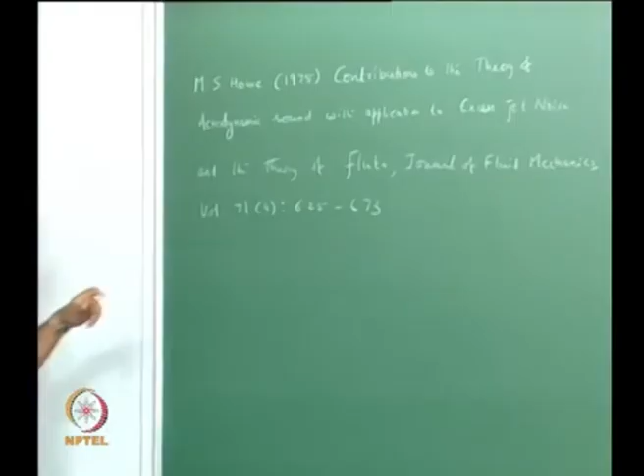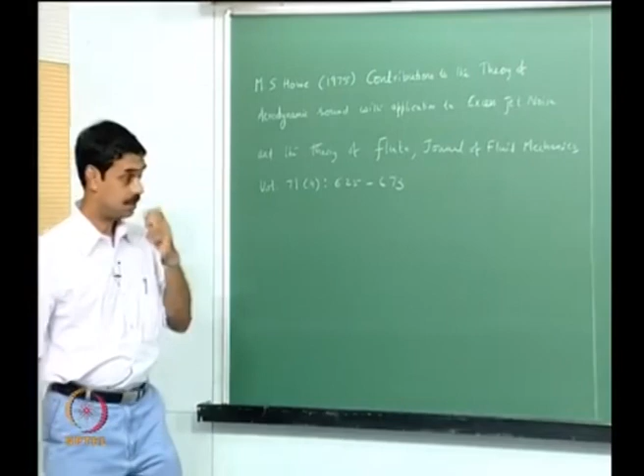This is also similar to the case with flow structure interaction and vortex acoustic interaction, and vortex acoustic combustion interaction. In this context I wish to give you a reference of a very famous paper by Professor Howe titled Contributions to the Theory of Aerodynamic Sound with Application to Excess Jet Noise and the Theory of Flute, in Journal of Fluid Mechanics, volume 71, issue 4, pages 625 to 673. It is a very big paper, almost 50 pages, and it is a very famous paper. You see that rockets and flutes, they are all behaving in a similar way.

A little later we will speak about the flute. I have brought some flutes with me and we will speak about it. But talking about the lock-on, we will see if these concepts are applicable in dump combustors as well.

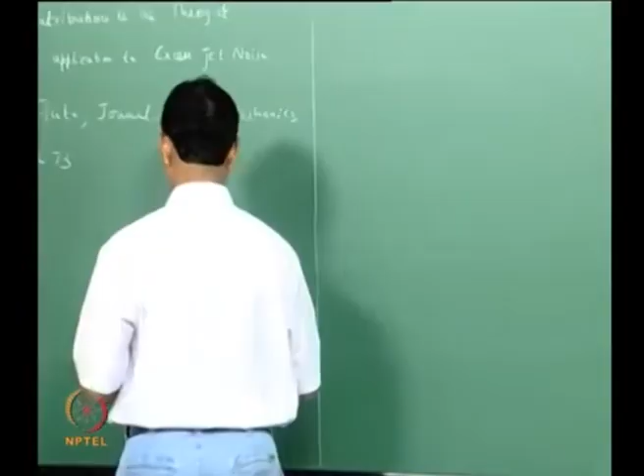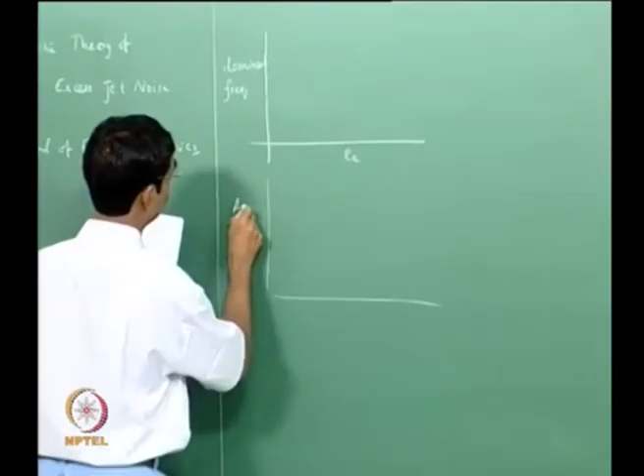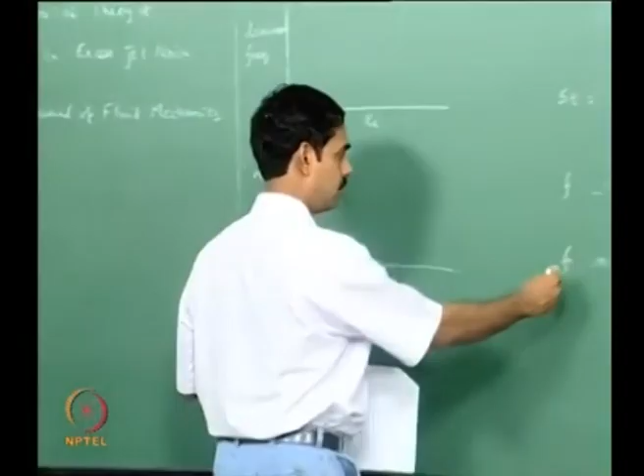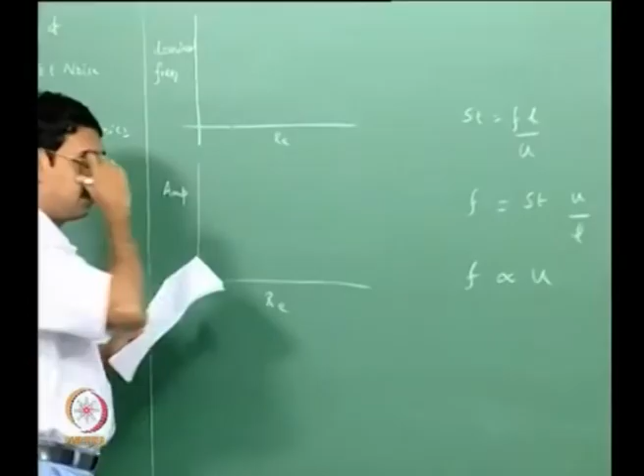When we look at flow structure lock-on, we look at the dominant frequency versus Reynolds number, and right below I will plot amplitude versus Reynolds number. The vortex shedding frequency scales by a characteristic Strouhal number. If you have a Strouhal number which is FL over U, then F equals ST into U over L, or F is proportional to U, and therefore frequency will increase with Reynolds number in general, because as you increase the velocity you increase the Reynolds number. You can plot velocity also here. So as you increase the Reynolds number, usually the frequency keeps going up for vortex shedding.

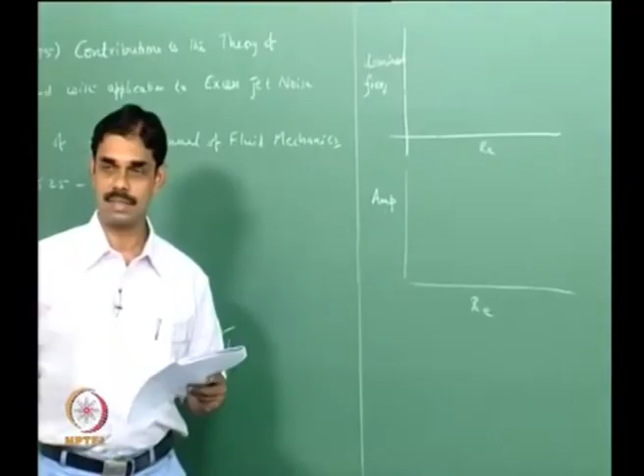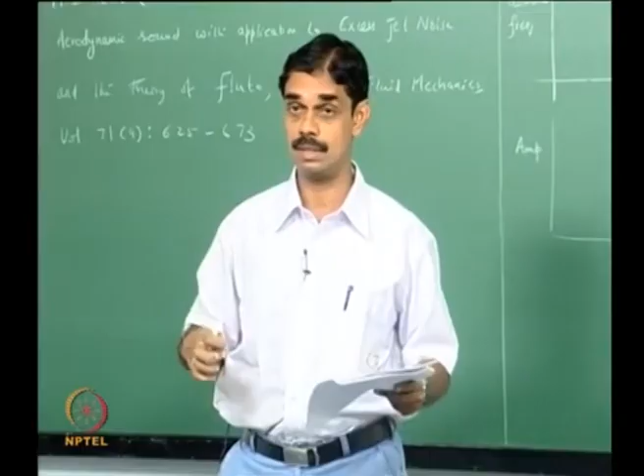But then what happens - let us look at the case of a structure. If this is tied to a structure, like a cylinder that sheds vortex, but if the cylinder is mounted on a spring or something, the spring mass system also oscillates. Another example would be the same kind of situation in underwater cables where you have flow and it sheds vortices, but the cable itself can move around or vibrate.

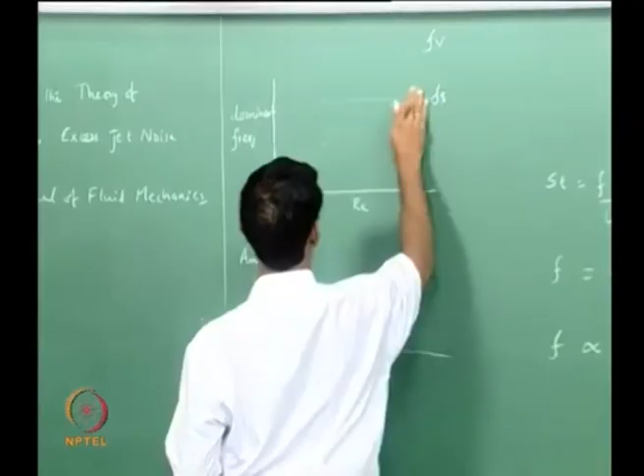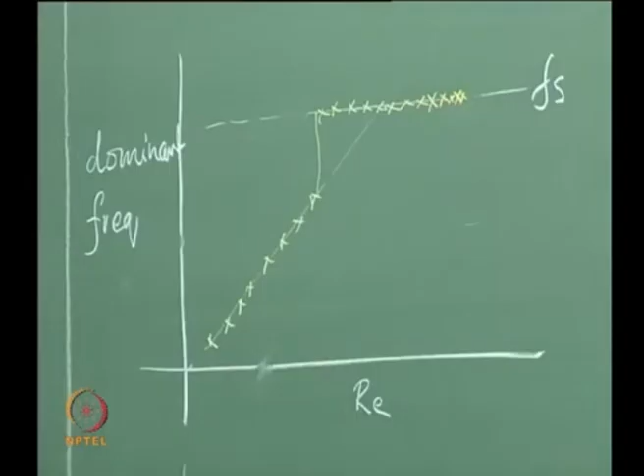So let us say this is the frequency of the structure, Fv goes like this, Fs comes like this. As you increase the Reynolds number, your frequency comes like this, and then suddenly it locks to this structural frequency, and both the structure and the vortex - the structure will vibrate at the frequency and the vortex will start also being shed at the same frequency. Everything works together and then it will go up, and of course there will be some hysteresis when you go this way and that way, but otherwise this is the pattern.

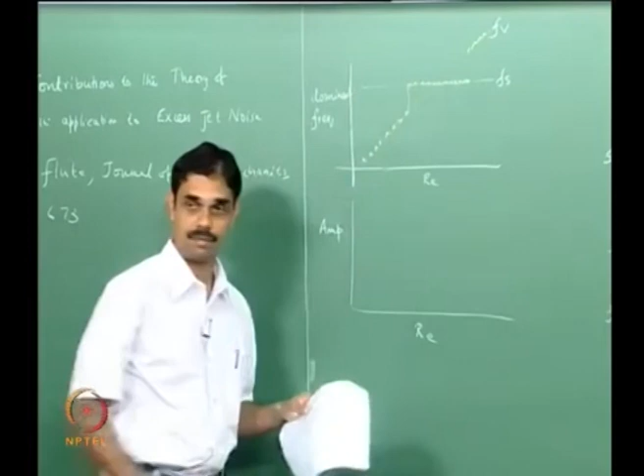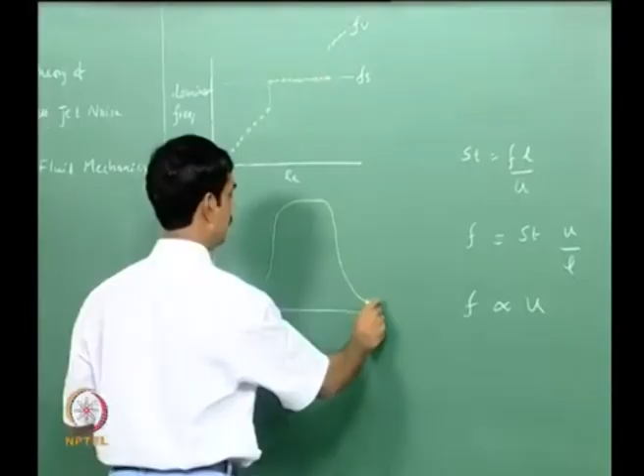And the amplitude would be like this, it will gently increase. Naturally as the velocity is increasing you get more noise coming out, but as you approach this lock-on there is a sudden rise in amplitude, and then there will be a decrease in the amplitude of the vibration or the vortex strength.

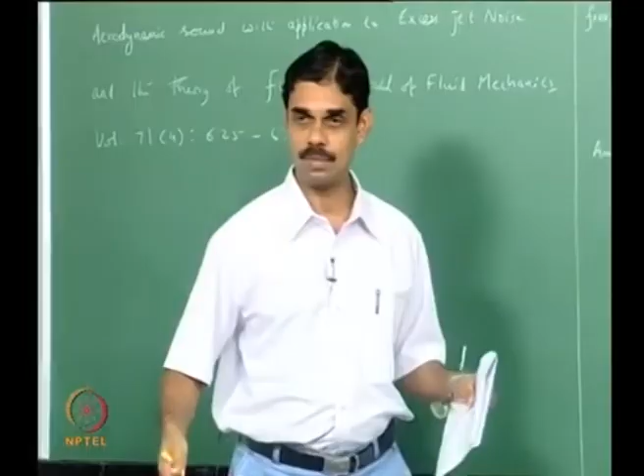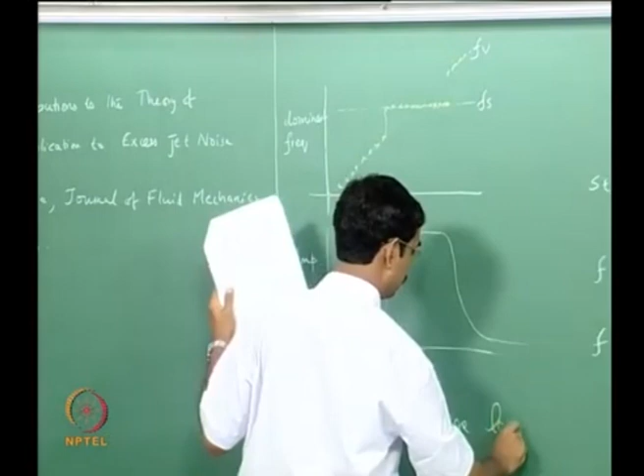If you are looking at a pipe, usually you can excite several modes. If you are looking at a solid rocket motor or a flute or something, you can have maybe more than one harmonic, whereas in a structure it depends - it may be possible to go to another harmonic and so on. So if you have such a situation, let us draw this graph again. This is structural acoustic lock-on, sorry, vortex structure lock-on, or it is like flow structure lock-on, vortex is like flow.

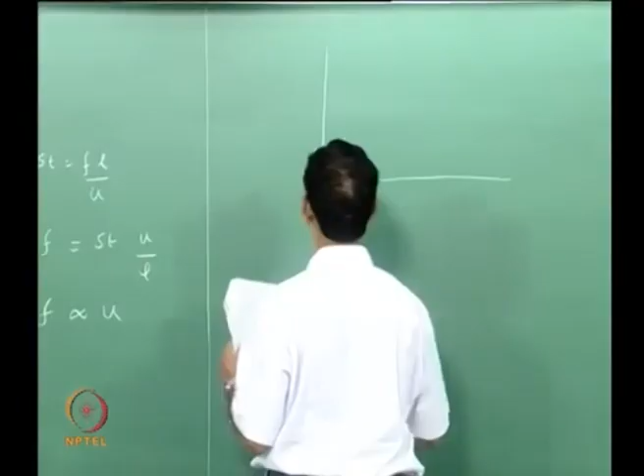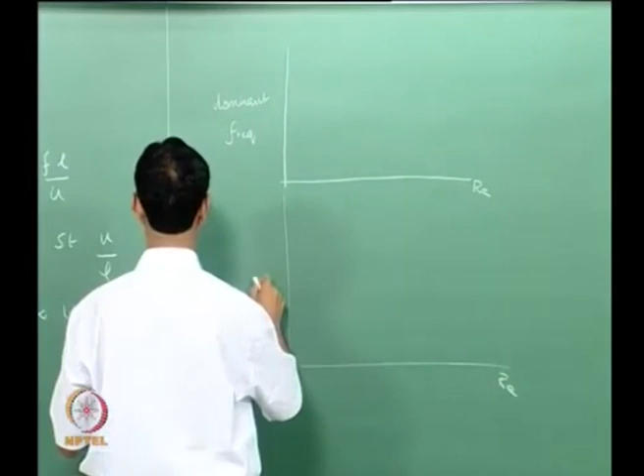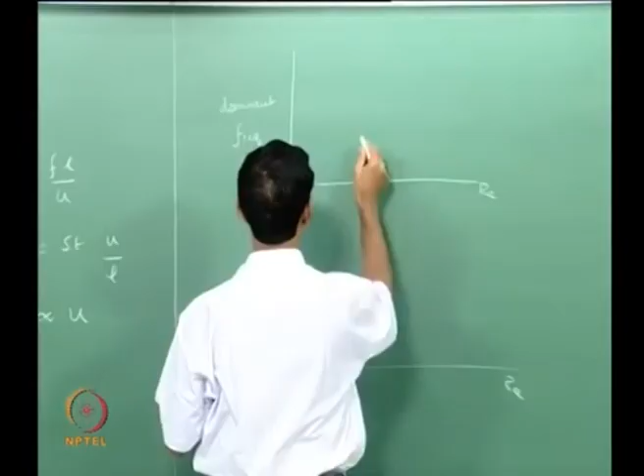Now if we look at vortex acoustic lock-on, we will have dominant frequency and Reynolds number, same graph, same scale, Reynolds number versus amplitude, and the same scaling of Strouhal number happens, so f will keep increasing. As it increases, let us plot also the various duct modes. You can have a closed-open duct or open duct with approximate formulas - what are the formulas for closed-open duct and open duct for the natural frequency?

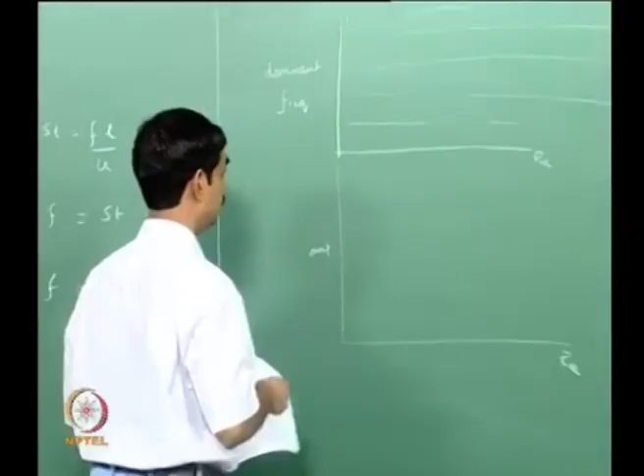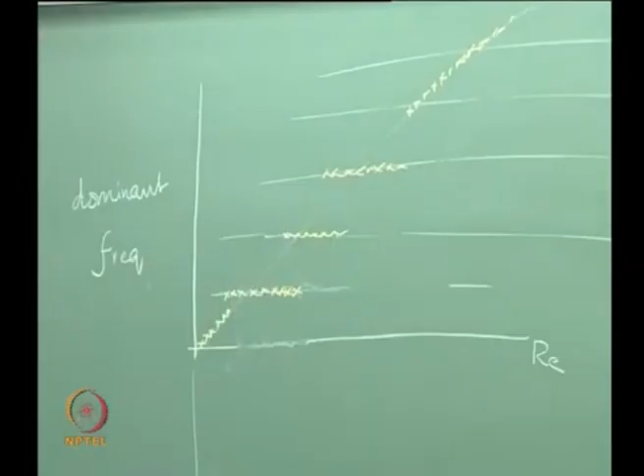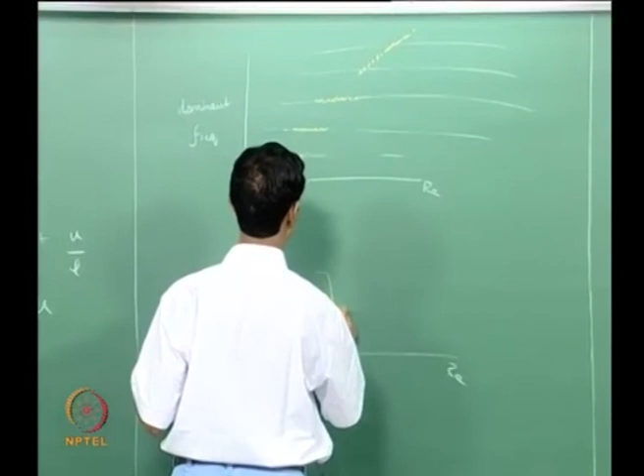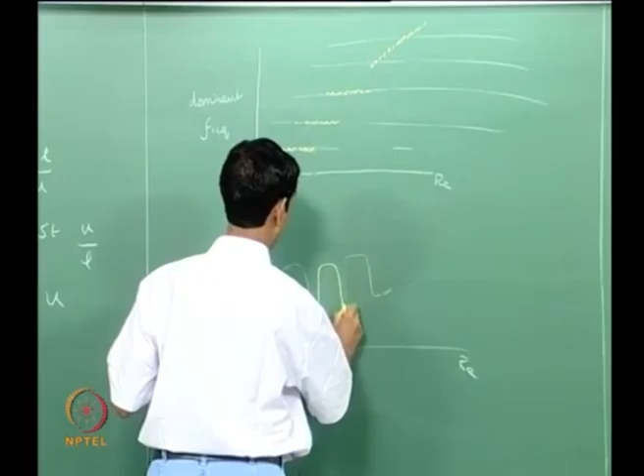C by 4L, 3C by 4L, 5C by 4L, and if you have an open pipe, C by 2L, C by L, or whatever. We symbolically mark these constant frequencies, and as you increase the Reynolds number, the frequency keeps increasing until it switches to one acoustic mode, then the next one, and the next. Eventually it may not be able to lock on, so it will just climb like this, and the amplitude varies schematically this way. The exact features depend on the experiment, the damping in the system, and many other factors.

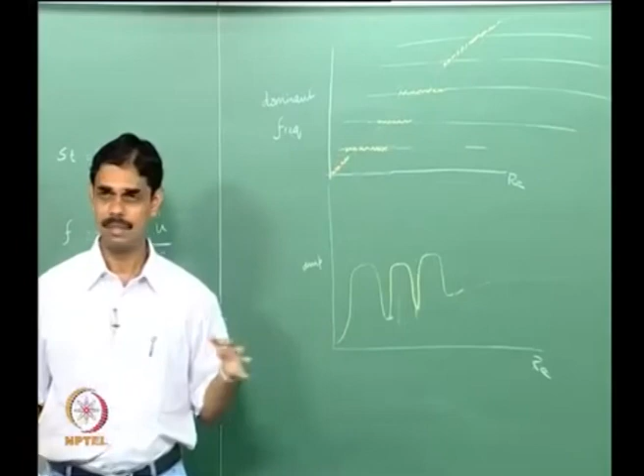When you have this lock-in situation—some people call it lock-in, some call it lock-on—the vortex shedding frequency and the tube's frequency, duct modes or tube mode, become exactly the same frequency.

You can measure them. For example, some years back, maybe 1997 or 98, we measured the vortex shedding frequency behind an orifice, trying to simulate the inhibitor in a rocket motor. We used a hot wire anemometer, and this value was exactly the same as the acoustic pressure frequency measured in the acoustic field. Whereas if you did not have this lock-on, you would have broadband spectra with no precise matching of frequencies—the vortex shedding frequency could be quite different from the acoustic natural modes. But when they lock on, they are precisely the same to several decimal places, and this is like a non-linear interaction.

Beyond some period, in some range this locks in, and beyond that it does not occur. Precisely how many modes it will lock onto is hard to tell. In our experiments we have managed to lock onto the 8th mode, 9th mode, and 10th mode. The lower bound exists because there may be no acoustic mode below that. Above that, the damping may be too much—there may be driving from the vortex trying to drive the acoustic mode, but it may not be sufficient to raise the amplitude because the acoustic damping of those modes may be very high. Precisely how many modes can lock depends on the actual case, but in general this is what happens.

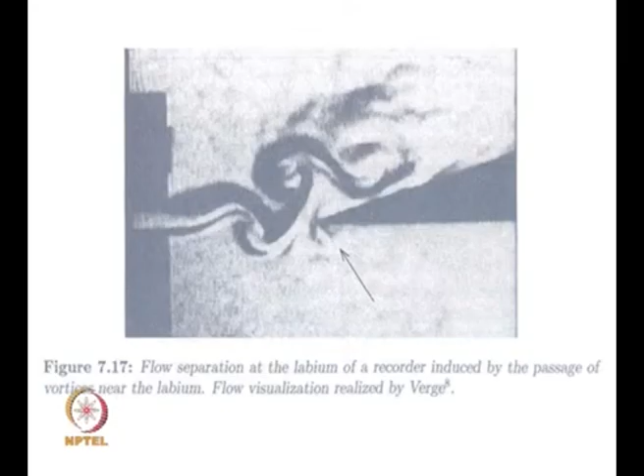Some jet comes out here, but I think the interaction is with this edge. So if the sharp edge is not there, it won't make sound. People have done schlieren photographs and flow visualization for these, and you can see how the vortex is coming and rolling up and so on. I don't want to project slides with this because that is copyright violation, so I will just show you this book.

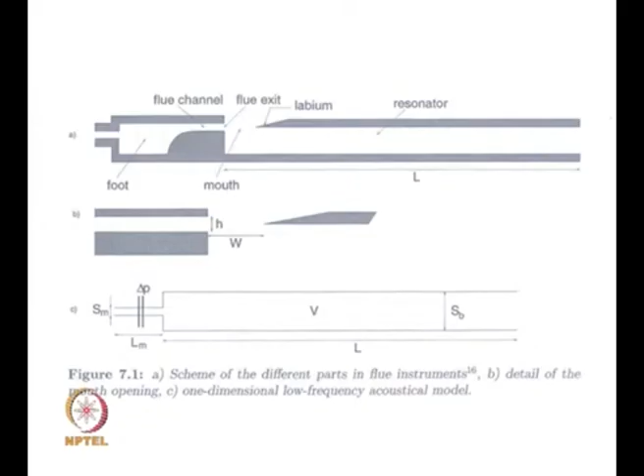First thing you can notice, let's look at the flutes. This is a short one and this is a big one. If you go to a Carnatic music concert they use different flutes, whereas in Western music they use the same flute for different notes. Sometimes they use the short flute, sometimes the big one.

When do you use the big one? For lower pitches you can use the big one, because frequency is inversely proportional to the length. So this is a smaller length, so it will be higher frequency. You can play sa in this and play sa in this, and see whether it is actually different.

So try to remember that note. This is significantly higher frequency. I think this one is C sharp and this is G, so there's a significant difference in frequencies there, and you can also notice that...

You move your fingers and that's how you get it, but had this lock-on phenomenon not been there, you would have to precisely blow at some Reynolds number to get a certain frequency. That would be incredibly hard because you also use the blowing power to increase or decrease the volume.

So you do not have to be so sharp, and that way you can use a little bit of this Reynolds number range to control the volume. So it's not like the flute player is critically calculating the critical Reynolds number for a frequency. No, he gets within some range, and when he goes to a harmonic he blows the same note harder. I will attempt to demo this, but if it does not work we will have to edit it out.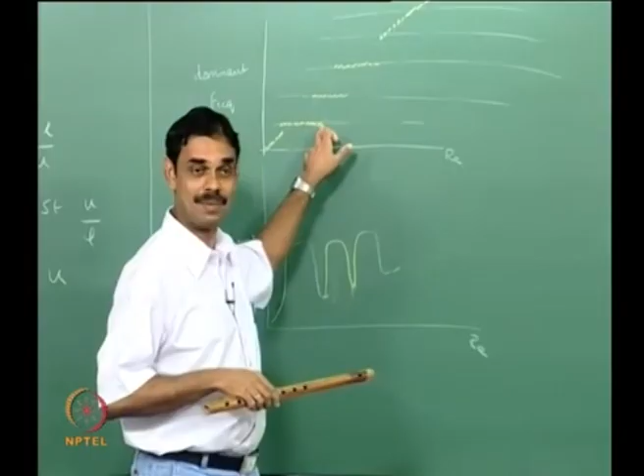So I went past this critical Reynolds number and then reached this frequency which is the harmonic, but I am not looking at a flow meter or a Reynolds number meter to figure it out. It's just if you play you get the feel.

Is there anyone here who knows how to play a flute? No. Just try playing it, let's see what happens. We'll see if flow acoustic, vortex acoustic lock-on happens or not.

So this is like a broadband spectra. The vortices by themselves have some coherence - play again. So he's getting more coherent, but the first time it was more like a oof. So Viksha, you can try, just get an idea. You have seen flutes in concerts, but let's get some practice - yes, don't destroy them.

One more - this is actually a North Indian type one because it has 6 holes. The South Indian ones have 8 holes. Everybody can practice and we can record how they do. Just blow, please. Now you are doing it - that's good. So somebody who does not know, can you play?

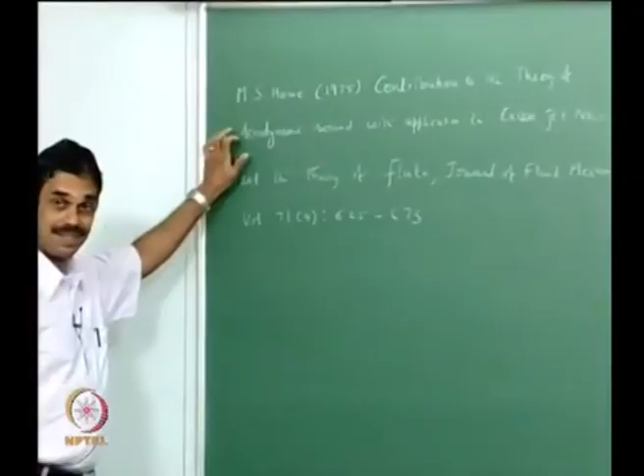The first thing I did when I started working on rocket motor instability with the inhibitor was to read this paper and some other papers and get an idea. I think if you learn about wind instruments, you can get a very good idea about this lock-in phenomena. I hope you saw this clear lock-in phenomena.

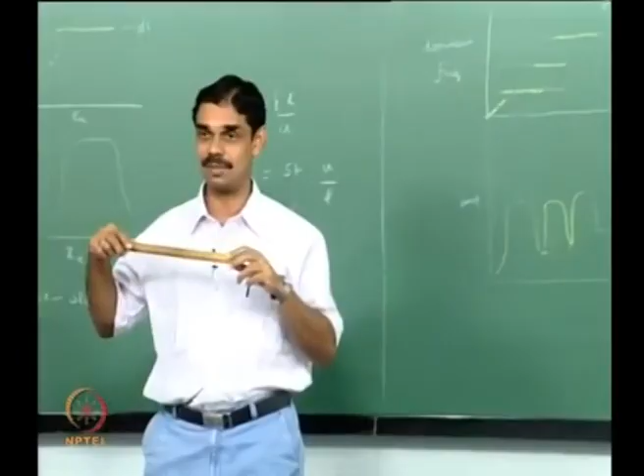It also depends on the grazing angle, which is what you guys are struggling to get many times, and if you blow too little or too hard, you would be outside the range. So here we are locking onto the tube modes or the duct modes.

Now let's look at the example where we are locked. See, if there is a vortex and if there is something to lock onto, some other frequency, it will lock onto that. In this case, when you tried, the foo sound came because you were trying to lock on, but you don't get lock on. But if you don't want to lock on, it will lock on. That's the way it is.

Let me give another example. I have brought some bottles here, and here we will not have tube modes but some other modes. Bala was speaking about the Helmholtz resonator, so this is like a Helmholtz resonator.

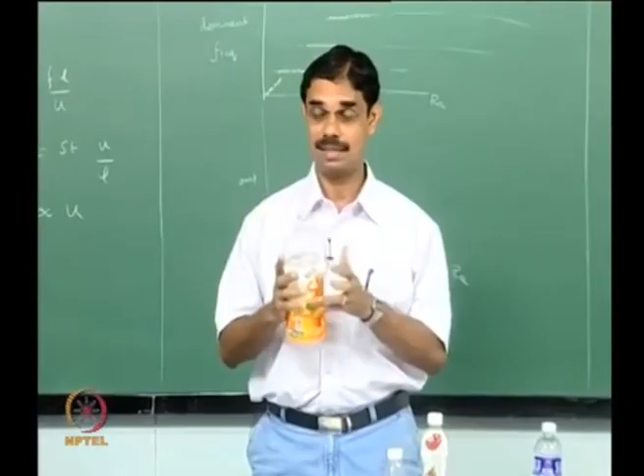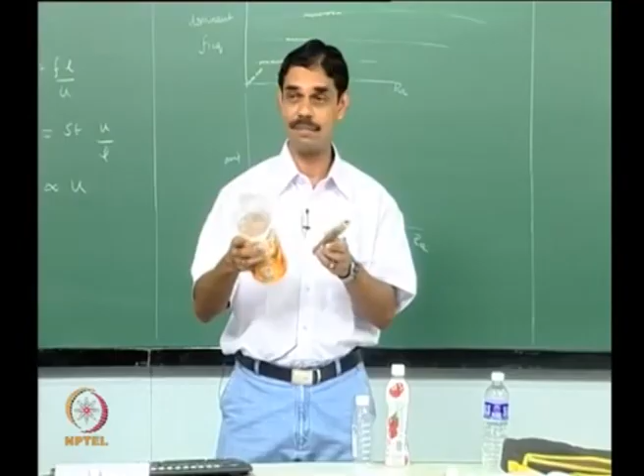I think he derived the formula. I will ask you in the exam how to derive the formula, but at the moment you can believe that these are approximately similar frequencies, similar lengths. So without any formula for the Helmholtz resonator and all that, I will demonstrate. I don't know if I have a smaller one.

There was a really small one somewhere. No, another one, yeah that one. I don't know what its length is. Oh, it's almost the same, so this little bit of difference is there, but it shouldn't be. But you will see an order of magnitude difference in frequency. So let's listen to the flute.

Let's listen to this. Okay, so I kind of cheated, I should get this frequency, so that is, if I get that or something like that, then okay. Now let's look at this frequency.

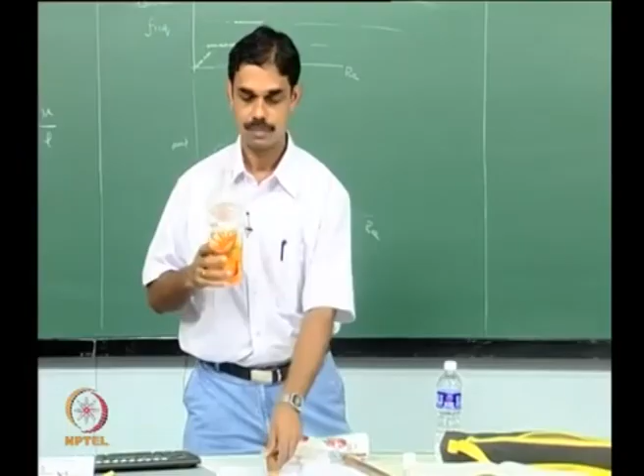This length, I was closing till here, so it's approximately the same length. Hope it works. It's way low, way too low, right? So it's definitely not a tube mode, it's not C by 4L or C by 2L, but it's the Helmholtz mode.

So here also the bigger size means lower frequency, so let me try this one. This is definitely smaller volume and so on, definitely this is having higher frequency than this. So you can take all bottles and construct a musical instrument actually. This is even smaller.

So there I had to increase my Reynolds number to lock in, because I was blowing very softly there and I was peacefully able to lock on, and here I really had to blow much harder. Because this thing's frequency is higher, and the lid sizes are approximately the same, so I really have to increase my velocity to get to a range where I could lock in.

So, let's see if this works. I may have to drink some more water.

Now if I drink more water, the frequency will come down. Anything that is there to lock into, it will lock into. So if there is a cavity, it will lock into the frequency of the cavity. That is what we are having here.

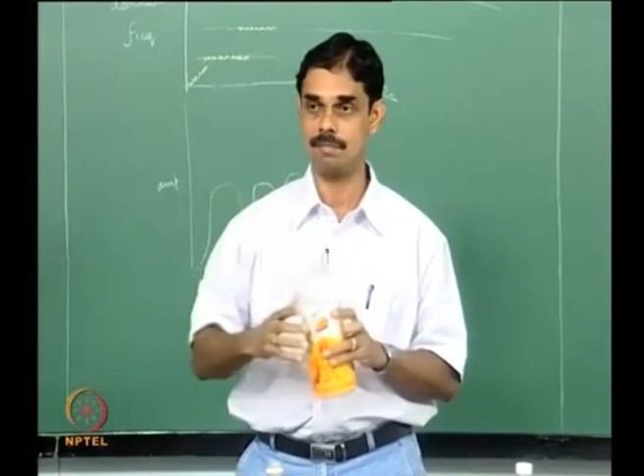So, what else? Is there any question on this?

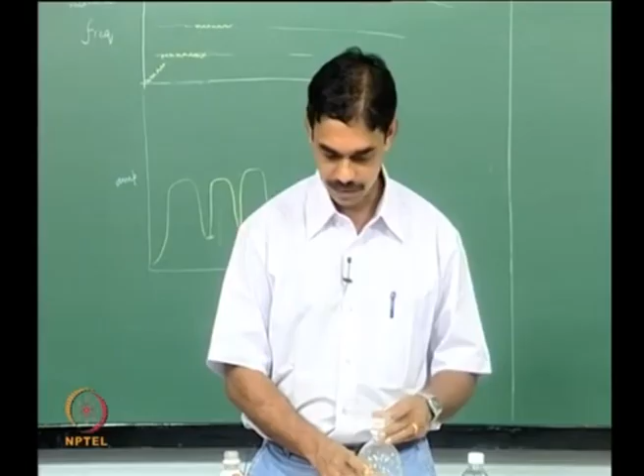If you have vortex shedding, and if you have a spring mass system or some kind of springiness structurally in the system, you can lock to that. Like if you have a cylinder mounted on a spring and mass, that is a system which is studied very well, and the vortex shedding patterns and frequencies of a rigid cylinder are different from when the cylinder is mounted on a spring. So this is an interaction between two resonating systems.

So flow structure interaction is one of them, flow acoustic interaction, and now we look at flow acoustic combustion interaction. Before that I will pause and see if you have any questions. I thought it was simpler to show these things this way rather than write formulas, and I hope you got an intuitive understanding.

So now the next question is, what happens when there is vortex acoustic coupling in a combustor? So there is combustion vortex acoustic coupling. Would you get this pattern, or would you get some other pattern? It's a little tricky question. In fact, people believed it was the same thing happening, but it turns out that it need not be. There is another scenario which I will present here. This is a recent discovery.

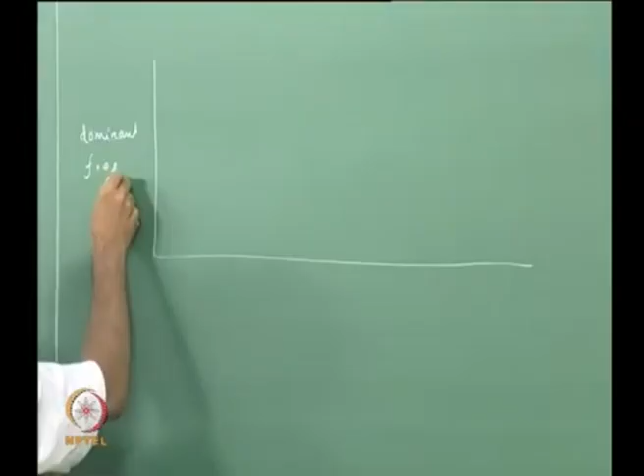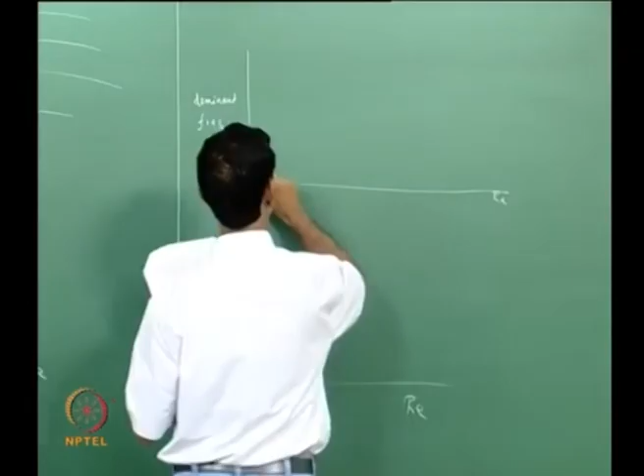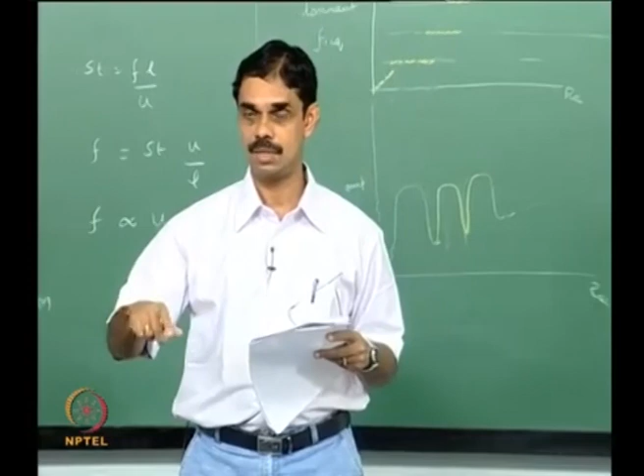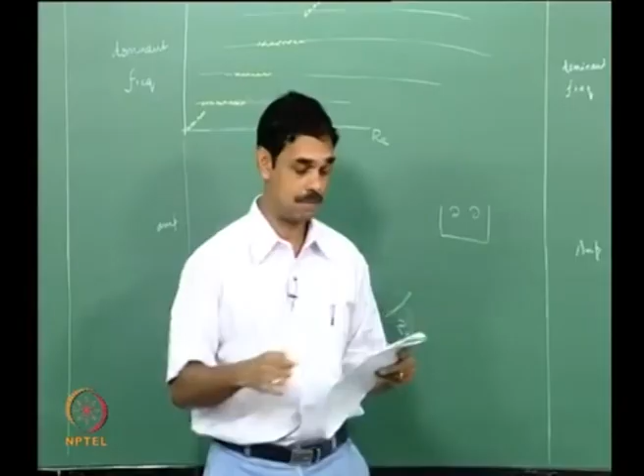So this is Reynolds number and amplitude versus Reynolds number. Vortex shedding also has several modes, so let us draw two modes here. With the same orifice, you can have several modes of vortex shedding, the first mode, second mode. And if you have a cavity this way, I can always have one vortex, or I can always have two vortices between them, and so on. So there are many modes, and you have these duct frequencies here.

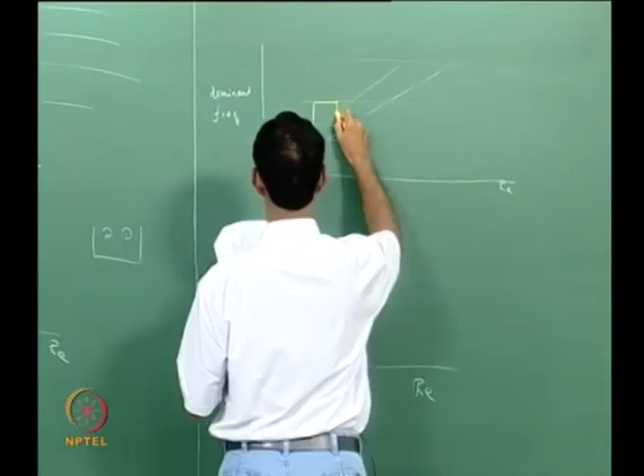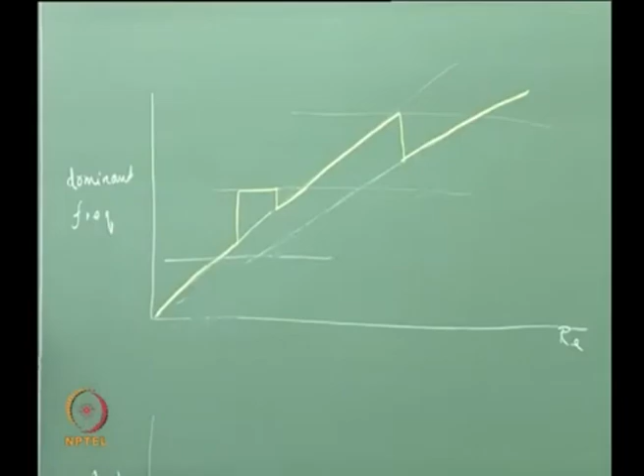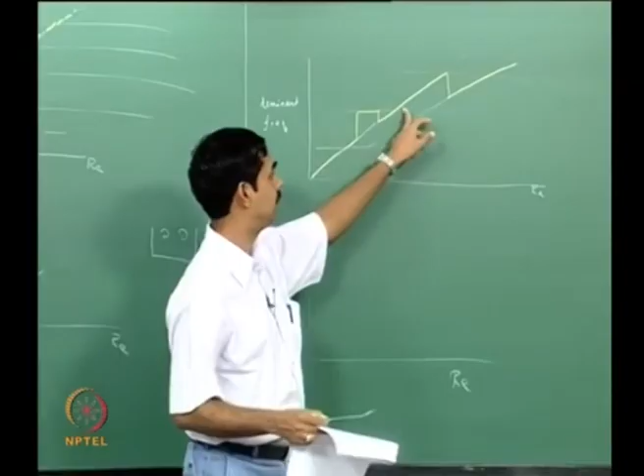You can actually have both the duct modes, and when the lock on is not there, you can see, if you make microphone measurements, both the vortex shedding mode and the duct mode. But then when the lock in happens, the acoustics locks to the vortex shedding, it seems - the actual details are not clear, but this is a new finding. The vortex is causing the periodic thing, and the acoustics is probably changing the boundary condition and all that to lock onto this. This is reported by our IIT Madras people.

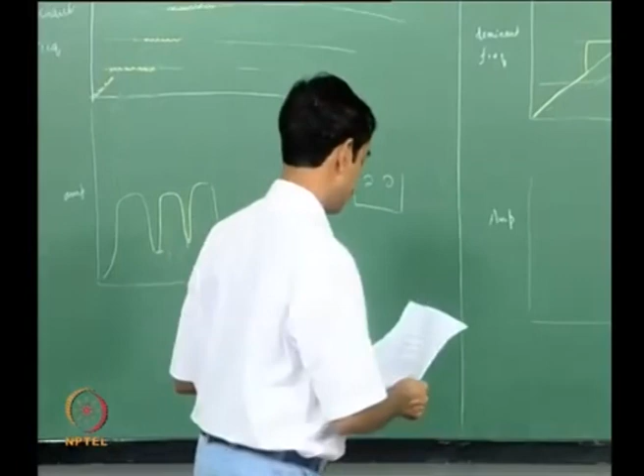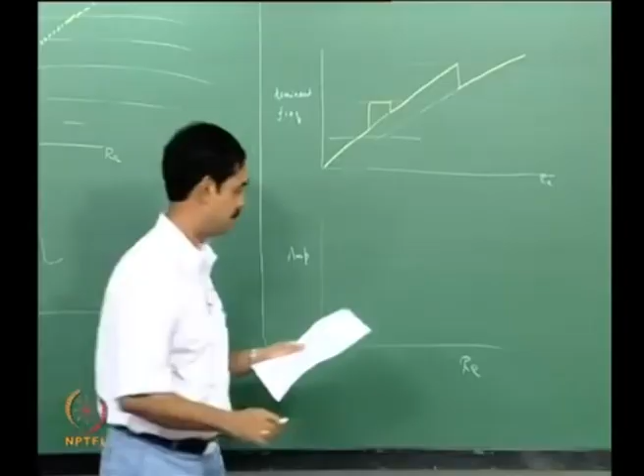So instead of the vortex shedding frequency locking the acoustic, here the sound locked to a vortex shedding frequency, and I will tell you when it happens and when it won't happen. This is S.R. Chakravarthy. He is a very famous professor at IIT Madras in thermoacoustics.

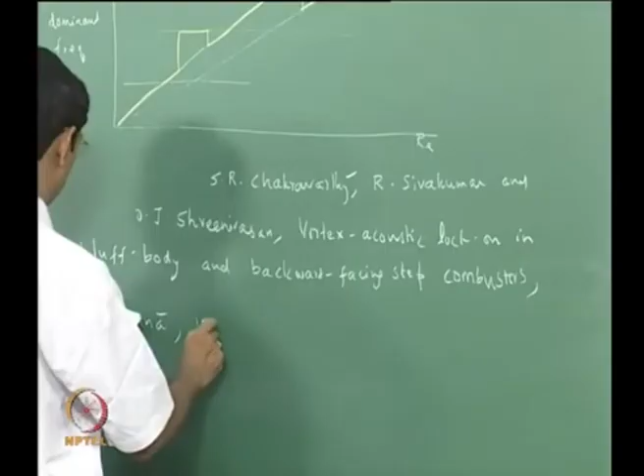You can also see this kind of situation in combustors. The one pulse combustor I have follows this - some of you have seen it in the RM lab - and there the fuel injection is right behind the bluff body. So it's non-premix, but it gets premixed very fast, like an industrial premix combustor. Since the holes are very close, you actually have equivalence ratio fluctuations, and these fluctuations follow the acoustic field. Whereas in these experiments, the fuel is injected way upstream, so by the time the fuel-air mixture reaches the flame, the equivalence ratio fluctuations are kind of smeared out. So the vortex shedding is the strong periodic thing, and sound is going towards that.

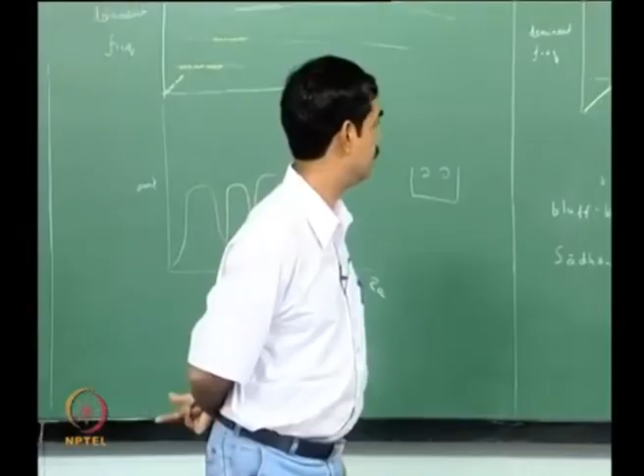The precise way the natural frequency changes must be because while lock-on happened, the impedance changed or something - I don't know the details - but you see this scenario in different combustors. I just mentioned this paper briefly to show there is still a lot to understand. This is a very recent finding, from 2007, and it's a very exciting subject with a lot to be learned - there are 214 references in that review paper.

So, are there any questions? If there are no questions, I will mention briefly about passive control of these vibrations.

Vortex coherence and the related periodic heat release can be minimized by manipulating the chamber acoustics to reduce the shear layer forcing. So if the shear layer is responding to acoustics and rolling up more coherently, and if we can somehow dampen the acoustic field with passive devices, then this periodic roll-up's coherence and strength would come down, so the threat of instability would be lower.

So what people do is put orifices upstream in the duct, or put dampers, Helmholtz resonators, or quarter wave tubes. At a location close to a pressure maxima, you can put a Helmholtz resonator or something so that it absorbs a lot of the energy.

That is one possibility. The other possibility, which is difficult, is to try to make sure the hydrodynamics and acoustics have different frequencies - so vortex shedding happens at a frequency far away from the acoustic field. If you keep the hydrodynamic frequency lower than acoustics, you might shift things around, but if not, the first mode, second mode, or third mode will get excited. So if they are quite far apart, that's the simplest thing to do.

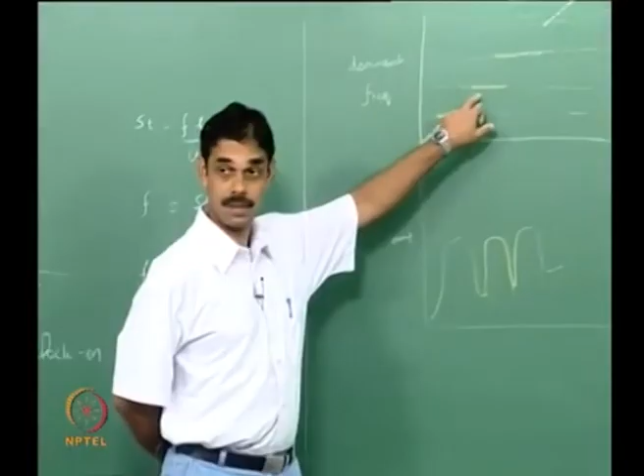So let us summarize. Yeah, you have a question. In that picture, was the dominant frequency versus Reynolds number what you have drawn? Yeah. There is no intermediate state, no. In actual situation, you mean whether it goes from here to here? Yeah, in this only lock-on frequencies are there. But in actual case, there will be a lot of intermediate steps.

Well, let us do a demo. There is no intermediate, it is just here or there.

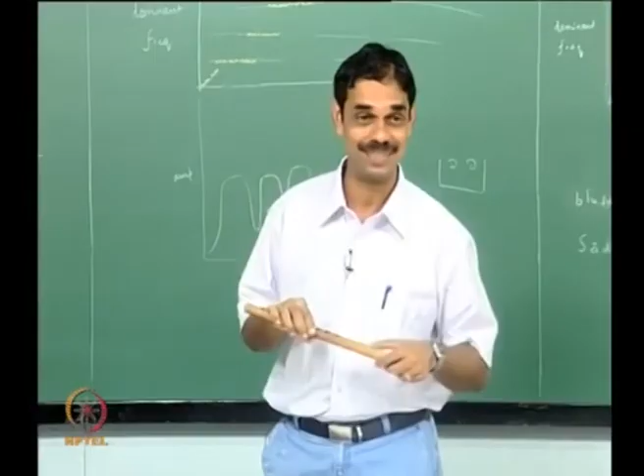I think I should not risk my flute playing skills. It's 20 years since I played. I take it out every year for the acoustic class and then go back and deposit it safely. But let's try again.

Some other note. So there was - you just get the note, or its harmonic, or whatever is the other duct mode. There is no in between. In between you can get if you do, then everything is there - the non-lock-on situation, then you get a broadband thing.

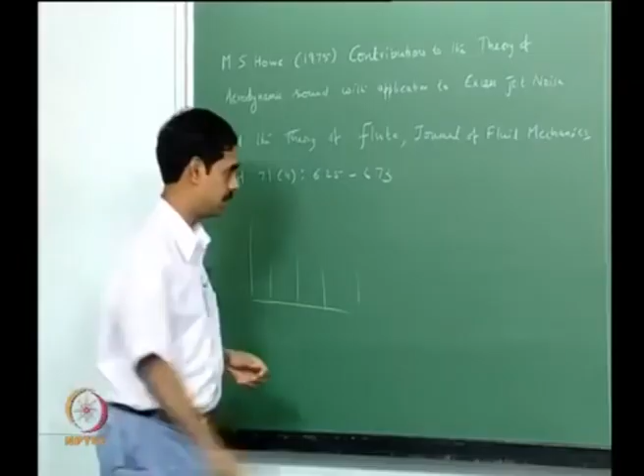So there the spectra will be, it will still be modulated by the natural modes, but if you look at the two spectra, when you have a tone you have very sharp frequencies, but if it is not a tone the spectra would look something like this. This is power versus frequency, this is how it looks like. Whereas if you make that sound, this is what you get, and the nice sound from the flute would be something like this, and typically there are even 10 harmonics and so on, but in between thing.

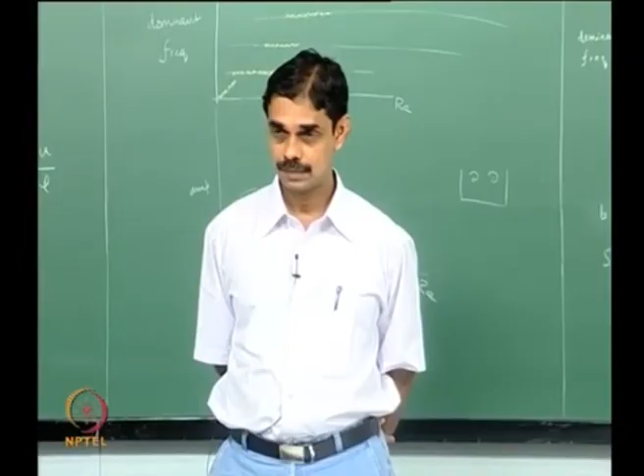So that means once you lock on any mode, you have to change the mode. So if you have locked on here and you want to get an in-between thing, you have to change the length by moving your fingers.

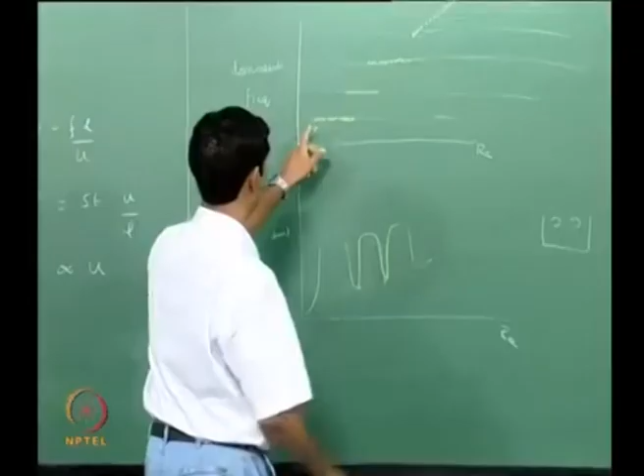But in a combustor case, that means once you lock on, any Reynolds number increase will lead to another frequency lock-on. So you are locked here, or in this situation the frequency will continuously change because you are locking to the vortex shedding mode. So if you increase the flow, it will keep on increasing the frequency, then it will jump to another mode, or the other way.

Whereas in this kind of situation where let us say your injection holes are near the step or something, and then you are locked here and you keep increasing the flow rate or the Reynolds number, the frequency won't change till some time, and then it will abruptly jump to a higher mode. So we cannot have a safe situation in between at all. Once it locks, till it gets out - and it's a big range - then it will lock to the next one. Here also the frequency is changing, but it's not safe. It is large amplitude under this frequency actually.

What is the order of magnitude of these dominant frequencies in combustion? Same as that of the flute. When the combustor is this long, you will get this frequency. This - okay, the speed of sound will be different. So let's look at a combustor which is 1 meter long.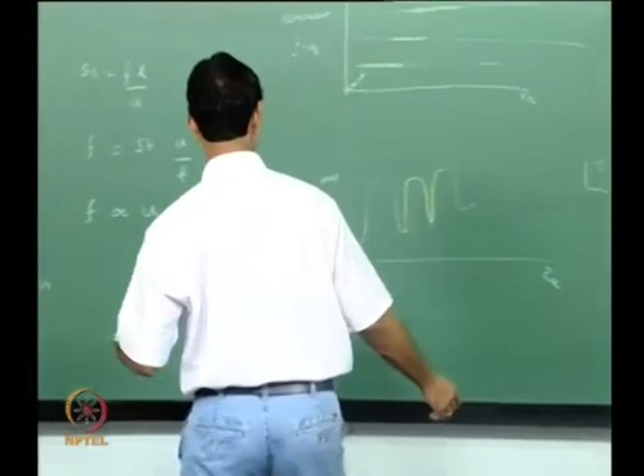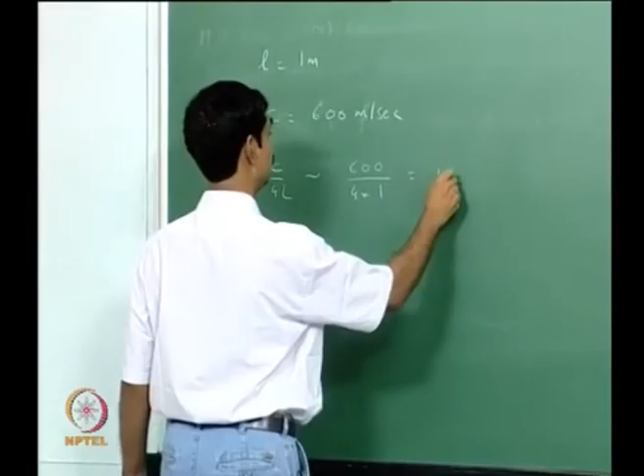So L equal to 1 meter, and average speed of sound, let's say, is like 600 meter per second because it's a higher value. Of course in reality you have to solve that problem you solved earlier - you have to know the temperature, solve the eigenvalue of that Bessel equation, or numerically find it. So C by 4L, let's say - if you have a dump combustor and the inlet is small, it will be like a closed end, or close to a closed end. 600 divided by 4 into 1, this will be how much? 150 hertz. Did I do it correctly?

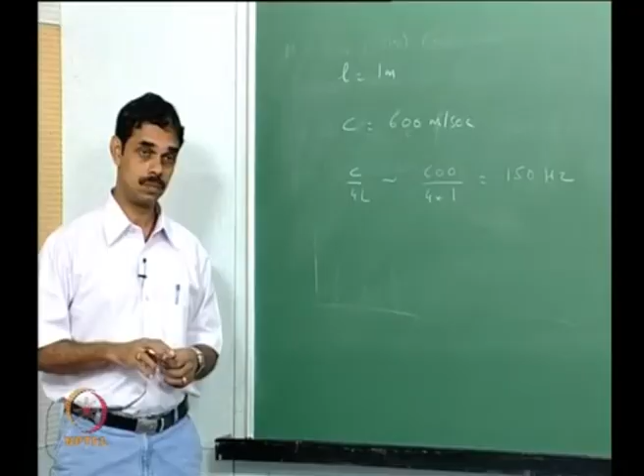Yeah, so it's of the order of 100 hertz, 200 hertz, or even 50, 60 hertz. We can probably design the combustor such that it can withstand some frequencies. Let's say 150 hertz frequency, if it can withstand - see, frequency is not what you are withstanding, it's the amplitude whether you are withstanding.

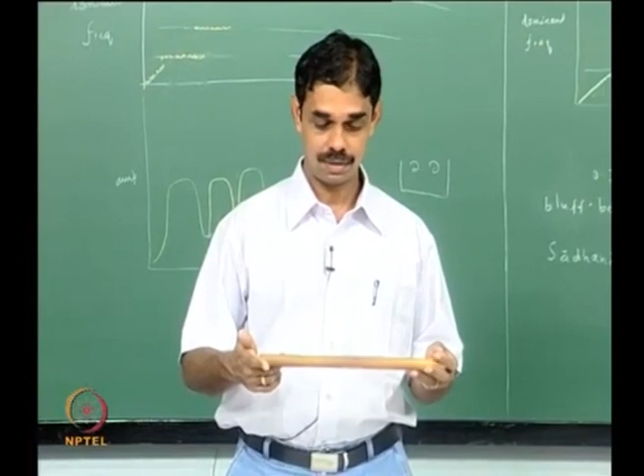So for example here I am playing, I don't know, some frequency, it's like 400 something hertz or something perhaps, and nothing happened to it, and some other flute I might play 250 hertz or 270 hertz, nothing happened. So if the amplitude is small, any frequency is okay, but if the amplitude is large, there is a problem. And the other issue is your combustor may not break up, but something else in the aircraft will have the natural frequency at this frequency, then there is a problem. But if that does not happen, if that is ensured that those frequencies are different, then it is a question of how large the amplitude is.

Or at certain frequency there is a tendency to be driven, and then you can change the combustor frequency. I do not know if that is what you meant. If the driving can occur in a certain frequency range, you make sure that the combustor frequency is out of the range - is that what you are saying? Can you restate your question in some other way so that I understand?

So structurally designed to withstand some particular frequency more. Yeah, even structural mode will vibrate in that sort too. Yeah, so yes, I mean if there is no problem with structures, you can have a frequency. I mean this is a good example - no, nothing. If the flutes break up with this frequency amplitude, then there is a problem.

So it does not break up, but the problem is if we want lightweight and not use too much material, if you make it big and fat, then it will structurally withstand, but then you do not want to do that also - that is the problem. So I think an engineer will not accept that solution, to make your engine robust by making it massive or something. I think he would ask the combustion engineer to reduce the amplitude somehow. Frequency, yes, you will ask to change the frequency if something else.

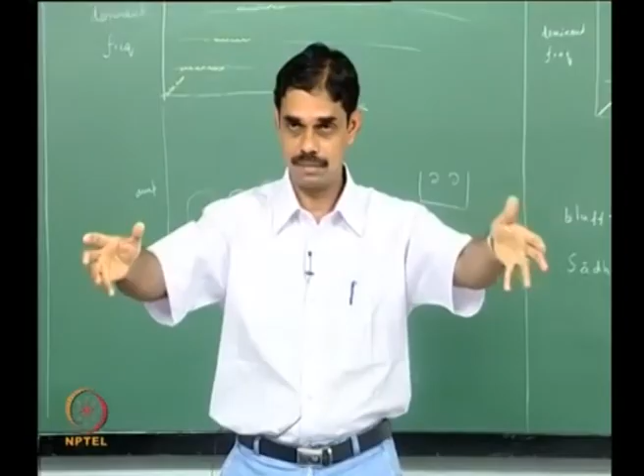So in summary, in the last 2 or 3 classes we looked at instability associated with formation of large scale vortices in the mixing layer, which coupled with the acoustic pressures to excite strong oscillations. We looked at cold flow results and saw that we are having Kelvin-Helmholtz instability, and looked at some brief theory. We saw that linear stability theory predicted a Strouhal number of 0.017 at the initial layer, but then there is vortex merging, and then there is a big vortex having a lower frequency, with a Strouhal number based on jet diameter and exit velocity of about 0.25 to 0.5, which is the preferred mode.

If you excite at that frequency, there is a good chance the vortex will become very coherent, and your oscillations will be excited at very large amplitude, and then the combustion gets periodic along with this vortex shedding. In cold flow you do not see very large amplitude unless there is this kind of edge-tone or lock-in kind of business, but when reaction is happening, that is a very strong monopole source, so periodic heat release happens, there is feedback, and the mixing layer rolls up into vortices where combustion occurs.

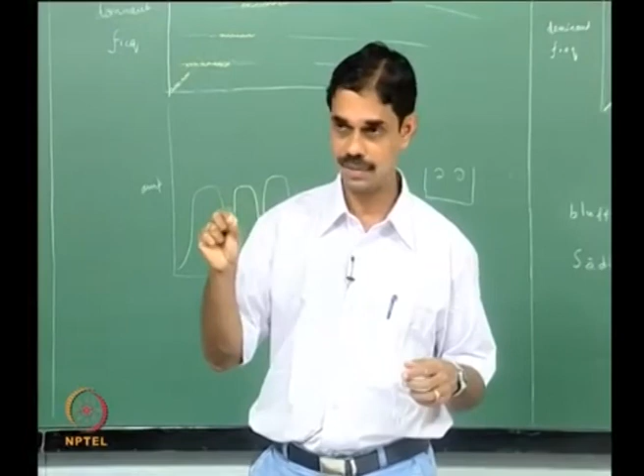So if you have a dump combustor and you just blow air, you will not hear anything. That is why in a flute they have that labium, and the vortex rolls up from there and hits the edge and makes the sound.

Once the mixing layer rolls up into vortices and combustion occurs, you start having the energy release being periodic in nature, and this will reach a maximum when the vortex is breaking down into fine small scale turbulence and the combustion suddenly happens.

There are different mechanisms which lead to this transition, and this is a very advanced topic. Vortex interaction is there, interaction of vortices with walls is there, so Kelvin-Helmholtz instability may come, but there is also this flapping mode instability. We also looked at flame-flame interaction, which causes flame wrinkling and so on.

In any case, a lot of different mechanisms all lead to fluctuating heat release, which if it is in phase with the acoustic pressure will lead to large amplitude - so there is acoustic driving. This goes by the Rayleigh criteria.

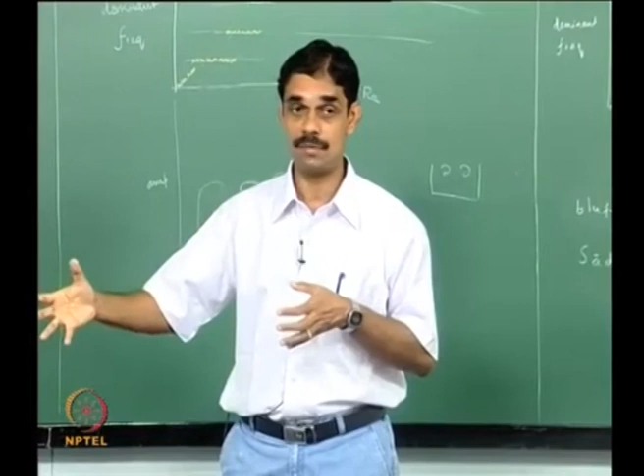So one way to control the oscillation passively is to change the phase - that means you change the time delay somehow, or change the location of the heat release zone. That way you are changing the impedance. You have a certain phase between heat release and velocity, but there is also a phase between velocity and pressure, and what matters for driving or damping is the phase between heat release and pressure. I hope you understand this.

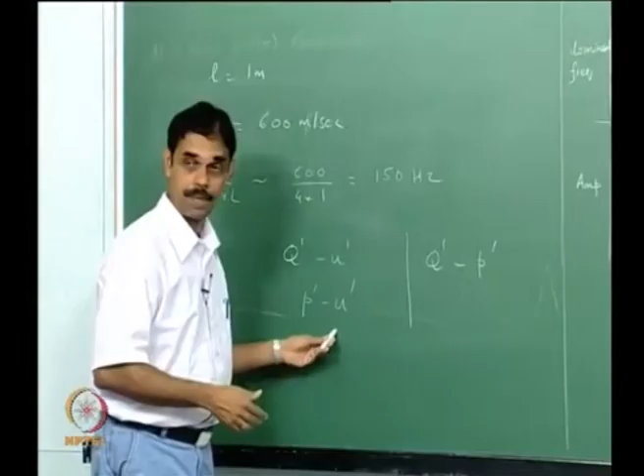In many of these processes Q prime and U prime have a phase, but what you want is to look at the phase between Q prime and P prime, and you can change that by changing the phase between P prime and U prime. That can be done by moving the flame to a different location where the impedance, P prime over U prime, is different - that is another strategy for passive control, which is why flame location is a very important bifurcation parameter.

So you can change the geometry, put dampers, or have a host of mechanisms to actually passively control - change the length, change the diameter, or keep these frequencies away.

I will stop here, and in the next class we will take a brief look at active control of combustion instability on similar combustors. After that we will speak a little about solid rocket motors and instability there, and if time permits, liquid rocket motors.